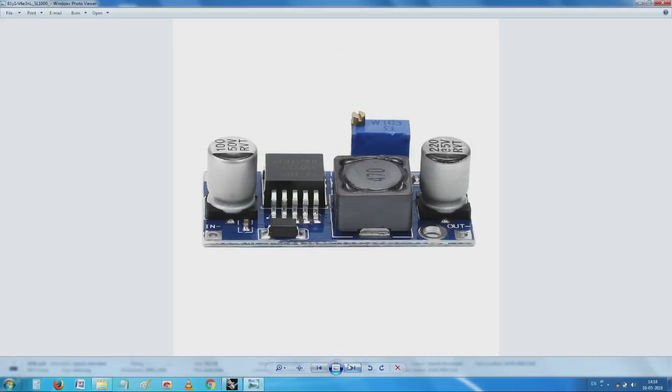Hello. So though this lecture has a little to do with 3D printing, we still have a starting point where we need to start. I just thought I would remind you from where I left off here.

You see here, this is the original 3-pin series pass regulator. You will notice the wiring and the whole thing is relatively easy. All I need is a bit of insulation here. I have heat shrink sleeves, then there is a reverse protection diode, and the whole thing has been nicely encased in an aluminum box. I have an advantage here: since it's made of a conductive material, in this case aluminum, this whole thing is very cheap.

However, when we switch over to any of these elements, these are all switching regulators. You have seen this, no? It is about the same size as this, there is no problem. That's the reason I picked up the switching regulator also, about the same size, except that it is full of electronics and full of places where it is likely to get short circuited.

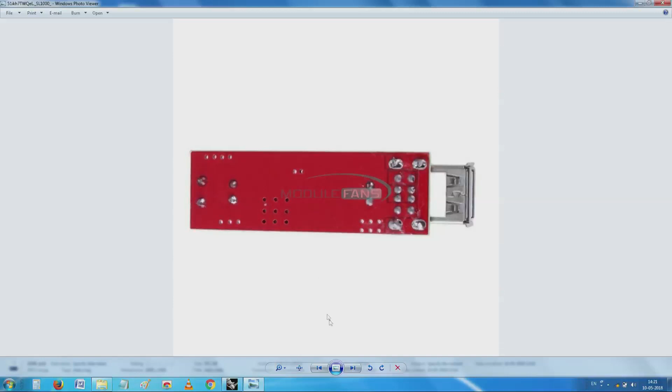Now if you kindly see the channels here, I will just take you to show something here - the same circuit, except that it already comes with... there are no mounting holes. There is only a small provision for a heat sink here, otherwise it comes with its own output jacks. This particular thing is an output, and then we have an input jack here.

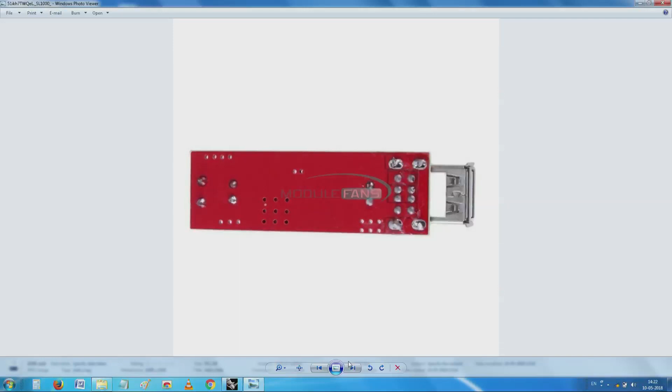So the previous picture shows you this is the input and this is the output. In this case it is probably relatively easy for us to just fabricate a cover, and there are no electrical connections involved. In fact we can make a tube-like structure, take a tube through which we can push this, and on one side we put an insulator, and overall we are in good company.

Making an enclosure with rapid prototyping for this is relatively simple. All we need to do is take the dimensions of the box outside - this dual USB thing - and miraculously they have made all the dimensions such that everything is within that height. So a tubular structure is easy, and the tube can probably stop here, with a step if you want, otherwise you make an opening, make a barrier, and then you have in and out like this. There is absolutely no issue about it at all.

Now you see this is slightly different, similar concept, except that both in and out have these screw-on connectors. The advantage of screw-on connectors is no more wiring is required, no more soldering is required.

So if I make an enclosure for it, I can ensure that the enclosure nicely sits here, and again for our... sorry, I hope I have not deleted it.

For our convenience and to avoid engineering drawings - I will tell you what the engineering drawing issue is - they have put a workshop scale and photographed it, saying what you see is what you are likely to get. So it is easy for me to see that if I look at this right edge, it is going to be around 42.5 millimeters, and that is absolutely easy. And then same thing with the other dimension also.

Then all the drawings are given here, and you see here this is a 32mm by something else, same PCB without the components, except that here you need to solder things, or you need to use a special connector and so on.

Usually this is a very good starting point of our projects. Here both mounting holes are on the same side, which is different from the earlier one. If you see here, the mounting holes are at all 4 corners. Then we come here, we have only 2 mounting holes.

Same thing here, the other dimension is given. If you check carefully, it is 20mm by some 32mm. Within the 20mm, we know at least what is the area that is required. These are generally used for plugging into some other circuits.

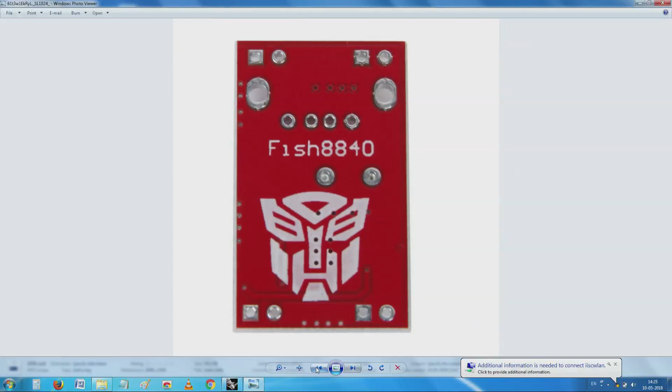Now you see at the back, we have again this same 2 mounting holes, and there is a provision here for probably a heat sink. Probably, I won't say it is a heat sink, or if you go back you will check whether something else is included in that. You see here, yes, it is for a heat sink only.

So we see here the actual chip is here. This is a toroid, or what do you call it, a transformer to increase the thing.

After you look at it, these 4 holes may be for via holes, and you see carefully everywhere this red thing represents the copper. So this copper has been made such that things are very nicely done.

Now let me stop here and show you these 2 things. Have a look at these 2 things. Sir, can you get us a closer look? They look about the same, is it not?

If I now twist it, they look about the same, except that when I turn it over, you will notice that the mounting holes are opposite. It is not about twisting it. If you twist it here, you see, still they come onto the opposite direction.

So this is the case where making a general purpose enclosure is a little problem, where our design will help. Can you see here, we have the mounting holes here, one hole top left, one bottom right. In this case, top right, bottom left.

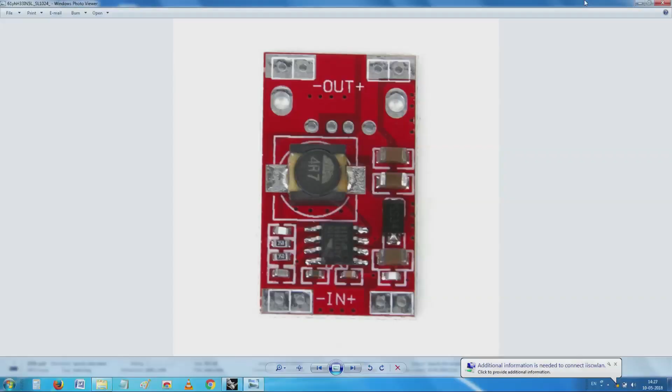Now let me go back to the drawing stage. I brought you and probably left you here yesterday.

So I have a printed circuit board which has 2 openings here, then I have a small aluminum plate, just loosely shown as if something is attached. It is not attached actually, if you go and push it here, it is very convenient, it just goes on top of it.

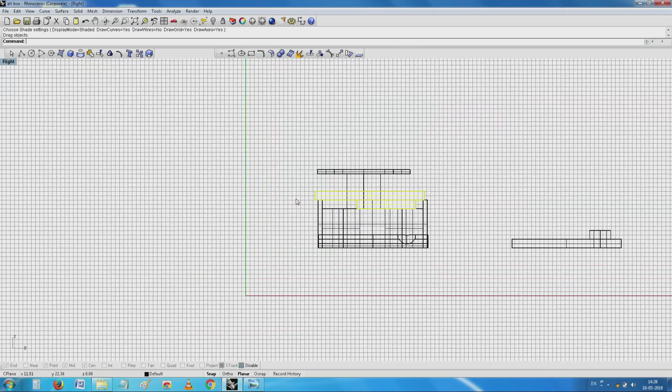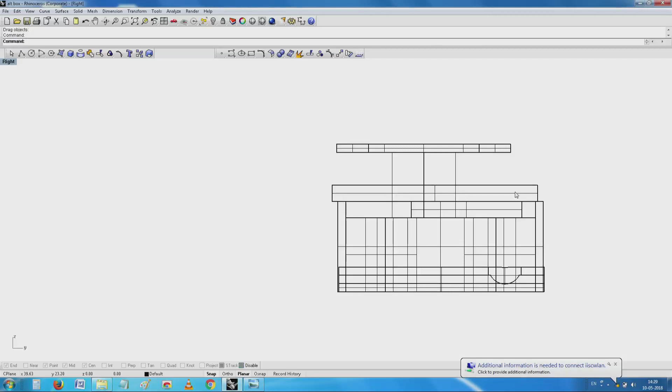In this, it goes and sits on top of that printed circuit board, and makes a contact. So maybe if I put it in this mode and then put it in the 3D shaded mode, it will probably make more sense.

So in the shaded picture you can see there. Only for convenience I have pushed the printed circuit board up. Now I will push it down for you.

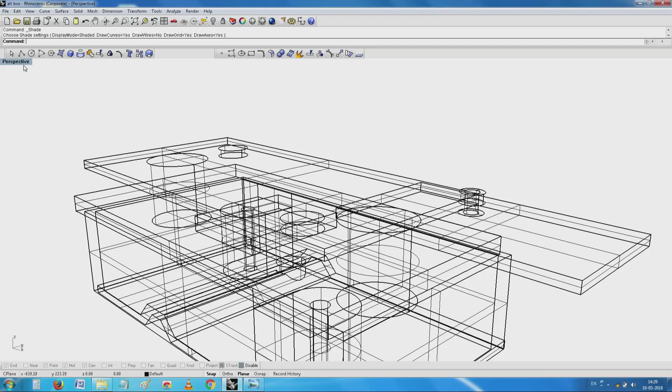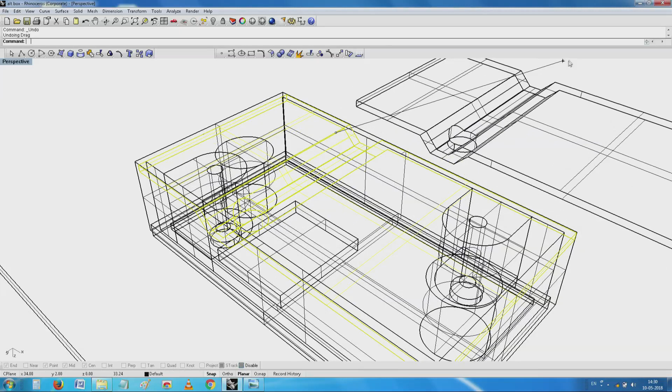And one thing which was quite okay, and now I will just show you why it is not okay, is this very fancy opening I have given here, thinking it will make it look good and maybe people will want to buy the product and so on. See this here, I had a tuning thing and then this was kept here saying it will help.

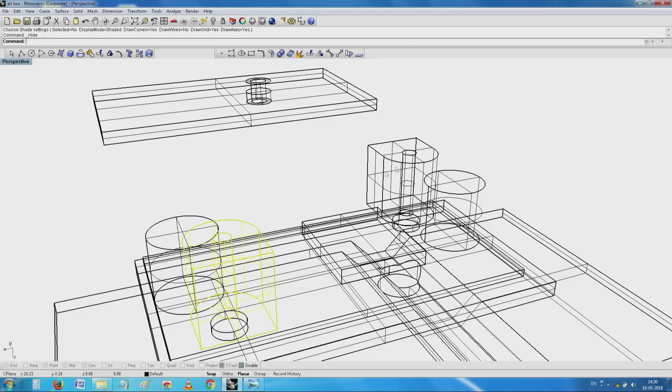Now, we come into the little bit of problems with construction of anything which involves this thing. I will now hide this to make sure that it will not interfere with our arguments. Now, you see why I have kept these bosses separate. These bosses are kept separate such that depending on the batch of the printed circuit board I have, I can move them to align with the product that we have got, because it is likely to be different. Anyway, right now I will hide them, I will hide the printed circuit board also, and just for this thing I will hide this also.

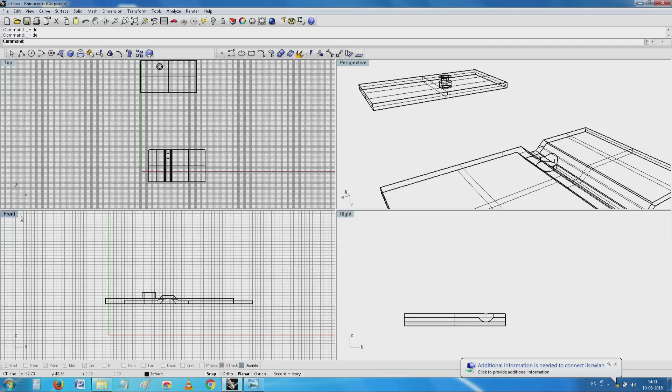Now, here we get into a very interesting, I do not know whether you should call it a problem or issue which needs to be solved. See, if I were to build a tapered piece like this, and which is again in reverse, you see it is part of the box. The building up will start now. This is the bottommost layer, the bottommost layer the build up will start.

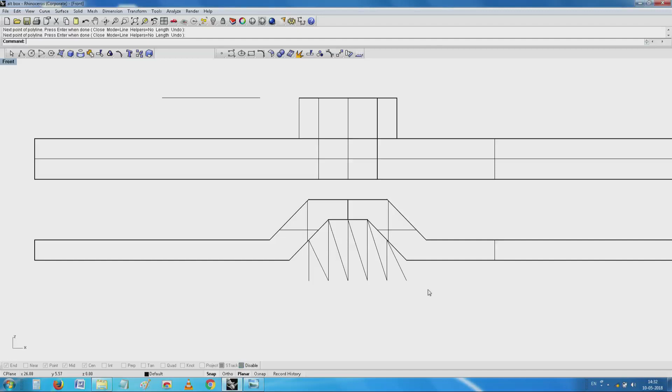Now, we have a very peculiar, you see here an angled surface which needs support from the bottom. So, the algorithm there will try to build lot of support material here. Just to make things easier, I will just try to draw a polyline, and you see if this were the base, the support material will start being built like this. Which is incidentally a big waste of effort, and further you will not get a smooth edge as we have shown here.

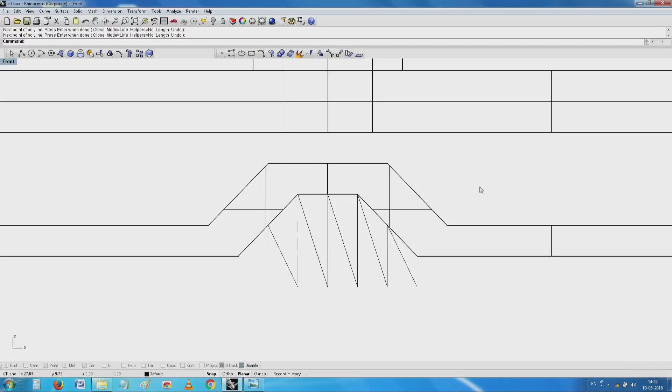It is fine because the algorithm itself takes layers, and the thickness of the layer will represent the z direction granularity, and x and y resolution will depend on granularity in the other direction. So, we may or may not be able to support, this is just a waste of material. So, is there a way of getting over this problem? Probably the easiest way of getting over the problem is, first of all, find out whether this is really necessary. Do we need to build a very complicated structure like this?

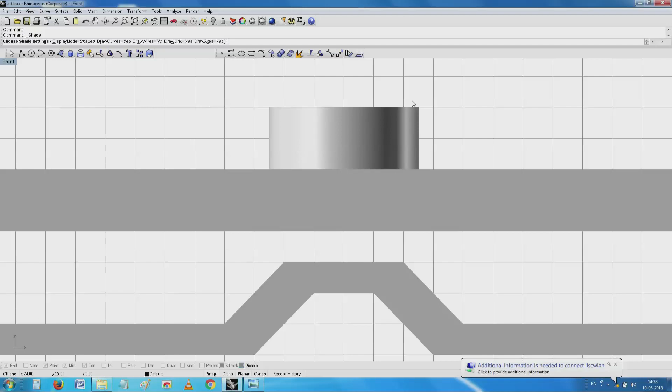Reality is no. While in injection molding once upon a time, with a little bit of aesthetics and industrial design, it made sense, similar function can easily be achieved. Instead, if you just make a cylindrical structure here like this, but one thing you notice, there is no fillet here, and right now for convenience sake we just made it straight. Advantage being the layup will start at the bottom, and then slowly after this thickness is built up, next layers will start building here. And it does not matter even if in the plan it is circular, it is not such a big deal for us. See, even in this view, if it is circular, it is not a big problem for us.

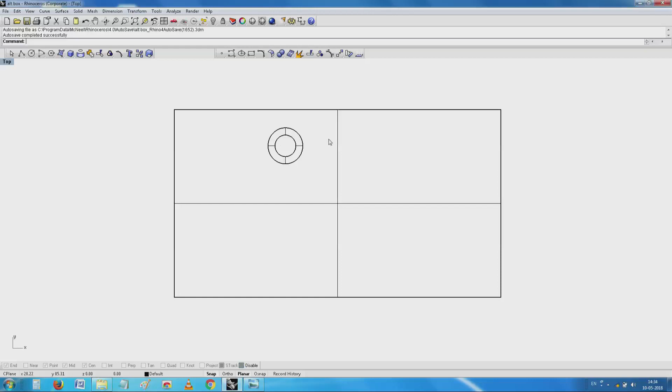So, the fused filament device, that head will start building up all these things. Once again, depending on how energetic you are feeling, probably making it a square also may make sense. Just make it a square, same way here, just for convenience I have made it a circle. Nothing prevents us from making a simple prismatic object into a square, because building up is easy. Otherwise every time it goes and comes back, a little bit of jaggedness will come here. Is there any other way? Yes, make an octagon, make a square, or make something, because what we are interested in is the center hole here.

Now, you see, building an object like this is relatively very simple, and the amount of support material and the amount of time required will reduce tremendously. I hope you got my point. My point being that if you make all those fancy things which are required maybe in mass production, in this case we can optimize very well to do this.

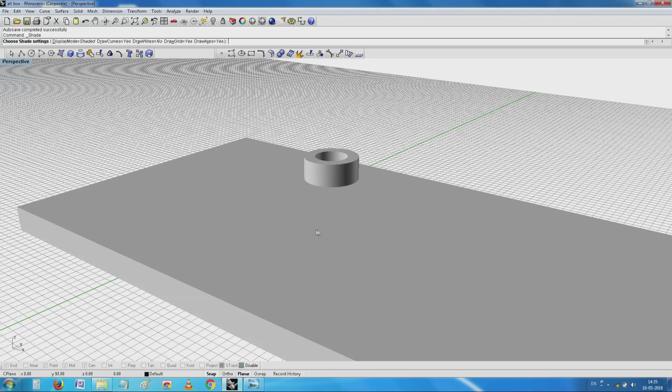Let us say you still liked the concept of a groove and it looked fine, instead of sticking to this vertical inclined thing, maybe some other way we can make. Why not convert it into a vertical channel? Maybe you can convert it to a vertical channel, make it like this, and then make the hole the appropriately correct size.

Further, you will notice when I try to make a hole, the solid modeling package has made something which looks very cute. You have seen this, no? A very beautiful, really cute looking thing has been made, which at one level, while it looks good, we do not know how well it actually builds up.

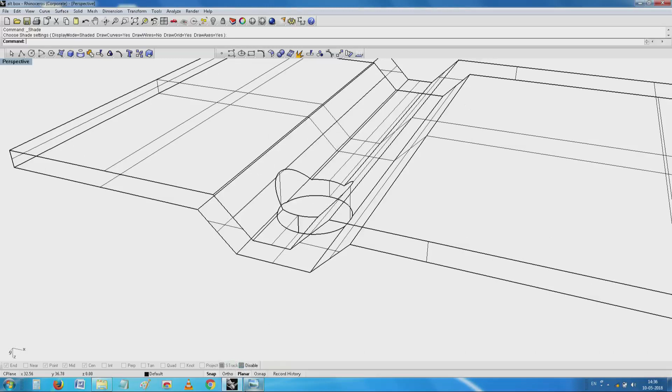See, nice, no? It looks nice as a nice thing, and all this here is probably misplaced, meaning you do not need that type of thing; all you require is a nice groove. In contrast to the groove, the other circular feature also is equally good.

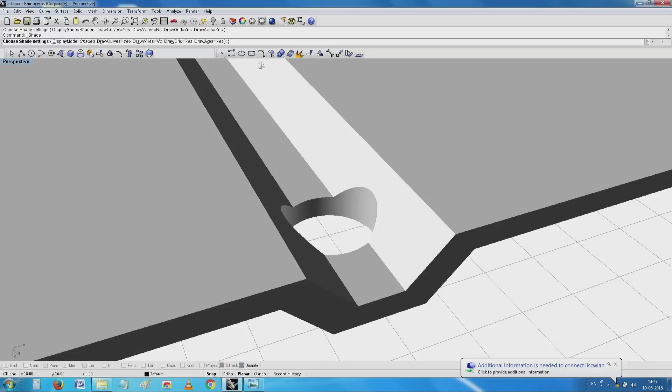Now, what I will do is unhide this whole lot and then see what is sitting where, and then put it together and see what best we can do. So, this one I will just delete. Right now I do not want it. Okay, this stuff I still have.

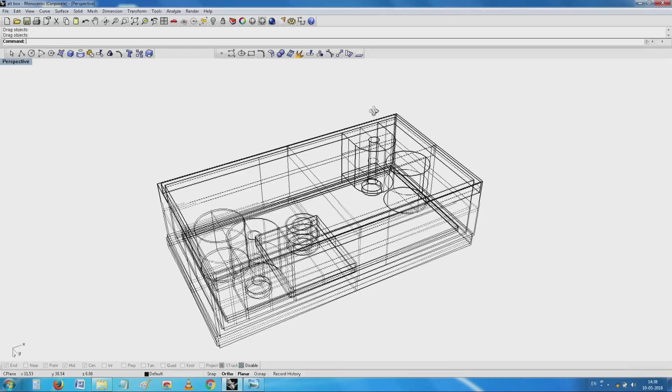Slowly I am reaching the point I wanted here. See that, except there is still a small minor thing there. This top has not aligned itself perfectly, but then it is okay. I'll just put up with it for the moment. I know how to correct it.

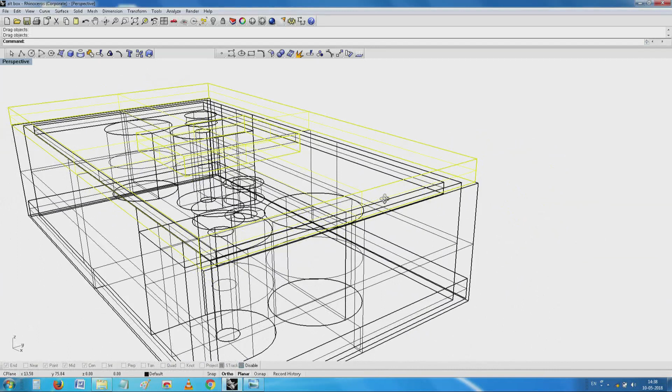So I have got a heat sink device here, and just fine. No, I think I will improve it. I will just delete it. Start with the proper heat sink device, and then again one more time I will start with the surface, which will start with a plane corner to corner.

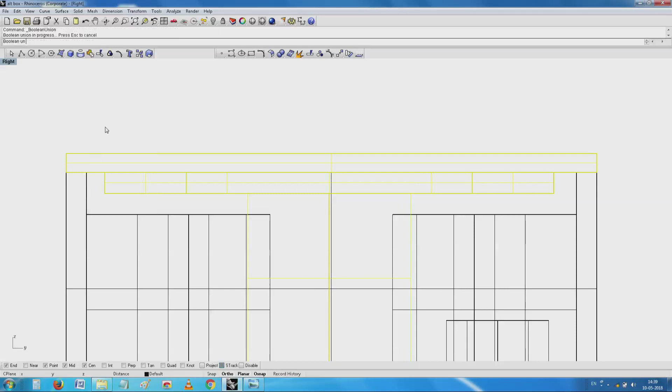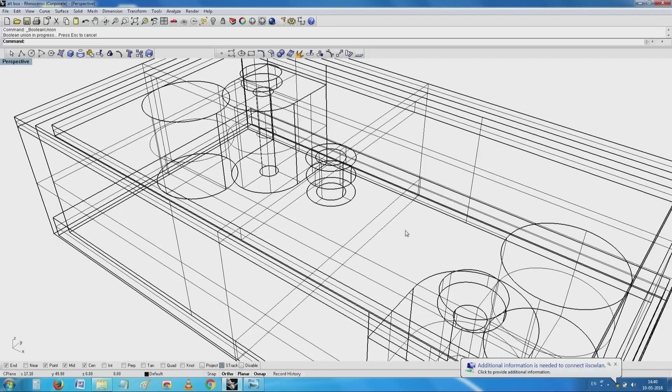This is my heat sink proper, this is the cover. I see if they are Boolean themselves. Fine, nicely it has got Boolean. Now I have got a reasonably good looking box with a place for the printed circuit board to sit, and then I have got a heat sink which will go and press on that, except the mounting hole of the printed circuit board has not been transferred here.

So what I will do is, since I have got the bushes in place, I will hide the printed circuit board, make use of these two bushes and then extend these holes there. So I try to create a solid using a planar curve. This is the planar curve. Same thing happens here.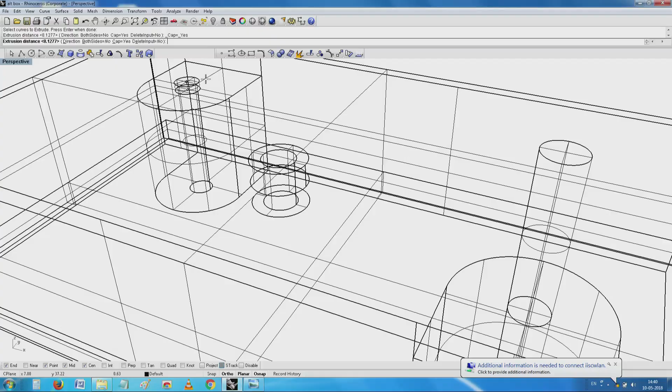You see here I have got two things which eventually can be made into this cover. So this is the cover I have created just now. So I have transferred those holes to that, then I will do the difference from here. First set of holes, second hole I will create here.

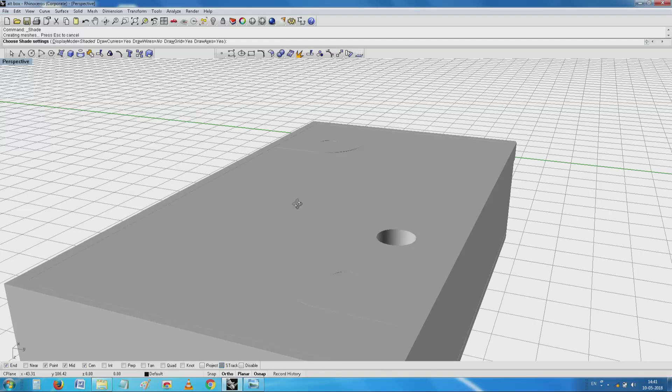See, now I have a reasonably good looking completely enclosed box, and there is a place here for me to tune the printed circuit board. Remember, the PCB is being mounted obviously upside down. Can you please show this, sir? I have a printed circuit board here, the heat sink is sitting from here, and the other side is where the tuning and so on will come. So the thing is being built upside down like this.

This is how the device will come, this will sit here, and because I have got these two mounting holes and these bushes, it will go and sit on the bush, and the heat sink will sit here, and the same holes which are given here are given on top.

Now I need to take a call on what to insulate inside. Do I put a small insulating layer, and something probably equally important is, do I pot the whole thing? There are thermally conductive but electrically insulating potting compounds. So I nicely put everything and then inject the potting; some are two-component, some are single-component things.

Once you inject it and put it together, it has two things. Intellectual protection is only a small part of it, that is not the important one. More important is, the moment you pot it, conduction will improve, there will not be any air pockets at all. Conduction of polyester or any of the resins is much better than air. And secondly, it is completely immune to any vibration or shock, but potting itself is an art. So now, you see, I will just turn it over.

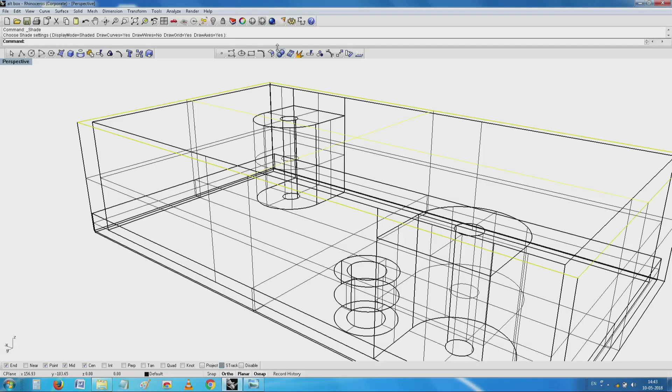Okay, that is the bottom portion. This is the heat sink part. Heat sink has holes. I will now hide this, and this is how finally this is going to be my final job which I am going to fire on the machine.

It is a little simple, it looks really quite nice and all that, except that the first thing you will notice here is, sir, why is this boss so big, is it not big and is it not small and all that. This is where you have to take a call. Logically, the same amount of material which I have left here is sufficient for here. Typically a minimum of 3 to 4 mm is required, and this hole is for a self tapping screw which goes inside. You understand, no? Self tapping screw which goes inside, and this one and so on like that.

Why I have made it a little bigger than normal is I have a nice area on which it sits, the maximum possible area, that is what I have included here. You understand, no? So it looks big, there is no reason why it needs to look big. The main difference between here and the injection molded part is, if we were to make a part like this in injection molding, one of the first things that will happen is, because of the large cross sectional difference, we end up with huge sink marks and the material will not flow at all. It is a very poor design for an injection molded part.

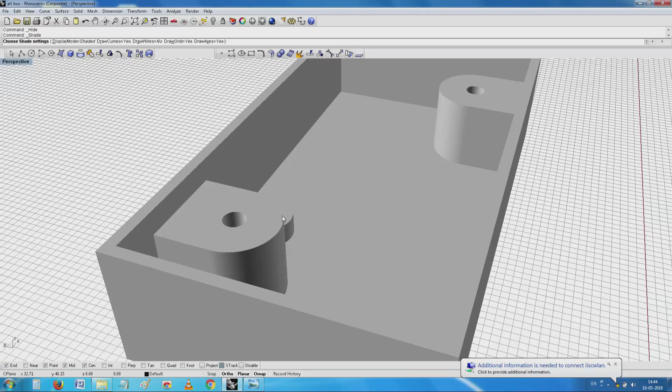But in the case of making a quick good prototype in our 3D printing, this is probably the best way to make things. You got my point? This is where the slight difference is there. Now right now I do not know, for some reason this refuses to get unioned with this. I will see whether it will still continue or it still does not like each other. It got unioned, no problem. Hey, very good, surprise.

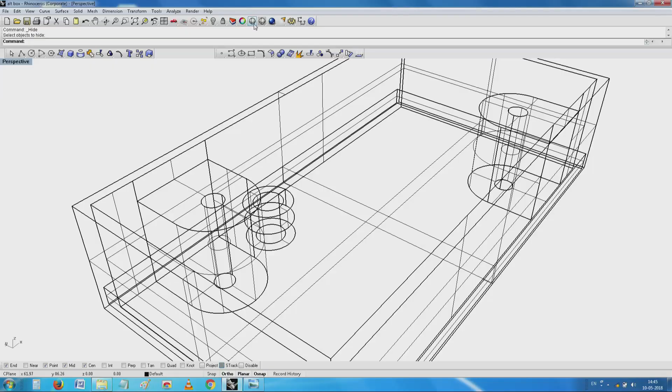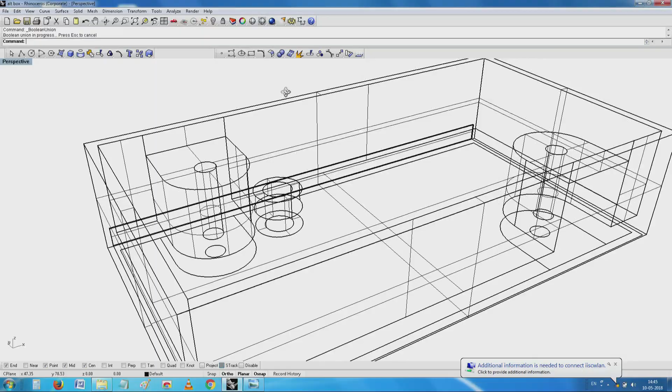So I have got a beautiful object here, the whole thing is integral, everything. Now only this bottom portion I will see if I can attach it to this, and then I will show you some other interesting objects which you will like here, solid. Then we have a union. Good. A little small error has happened, do not worry too much about it right now. The whole thing has turned out to be a single object. Because of a little projection, probably that thing has happened.

Now to make this a little more, let us say if it is to be made in injection molding, we will invariably end up having to give fillets here, otherwise it becomes very, very weak or stress concentration will occur. In this case also, if you suspect that there is too much force coming here, it may be possible for us to give fillets. Okay. Loosely I will try just one surface to fillet and show you how it comes.

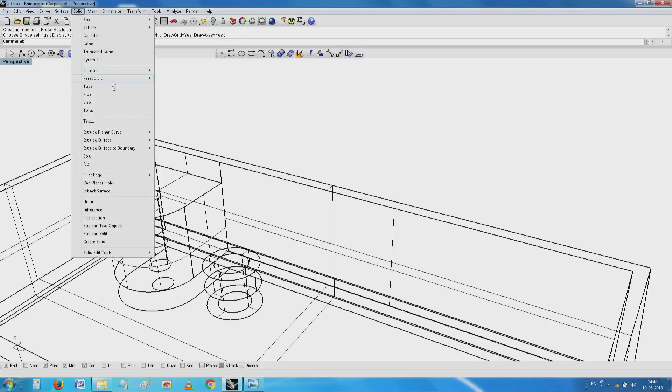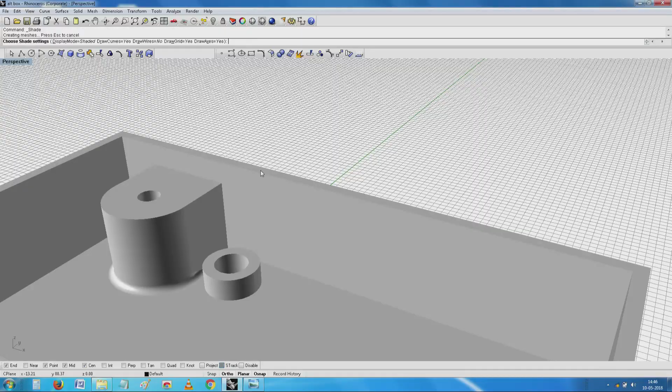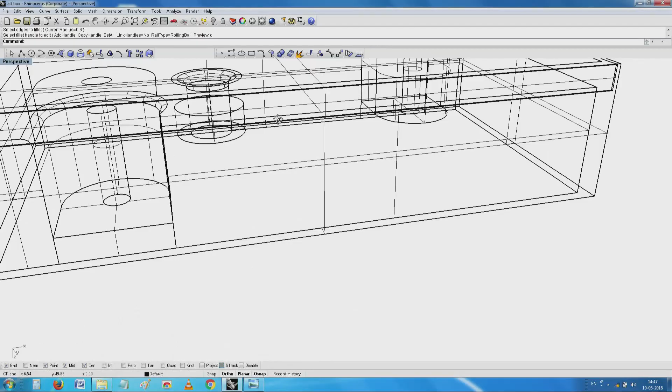Yes, I have a smooth fillet there. You have seen this. I will see now whether I can do a similar fillet here. See here, what looks like an obviously cute fillet has happened there, and correspondingly on the inside thickness, see here in the inside thickness I have one more.

This is conventionally what you are likely to see in an injection molded part, except that, as I told you, it does not build well when we come to our 3D printing. So we avoid such things as much as possible. A much easier way will be to have steps. Steps are much easier to build, even chamfers do not build well, in spite of whatever the manufacturers claim.

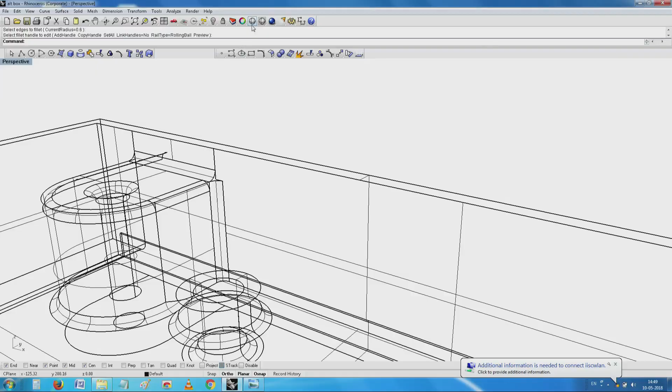See here, at least it looks nice, and it does avoid the stress concentration which is likely to occur, the same thing as we have in the other thing, except here now you have to take a little more care to see what best we can do about it. See there, it looks quite okay.

So, right now I will stop this particular experiment, then I will try to take just a flat face and show you how we can attempt to build these things here. So, I will start with a fresh drawing. As before, I will start with a surface, probably a plane.

I have a beautiful surface here, okay. Nice surface, then I also will make a small curve to build a... imagine this is the pilot hole, and then I represent the material thickness here by this, okay. So, I am just creating a step here and trying to see how well I can create a solid.

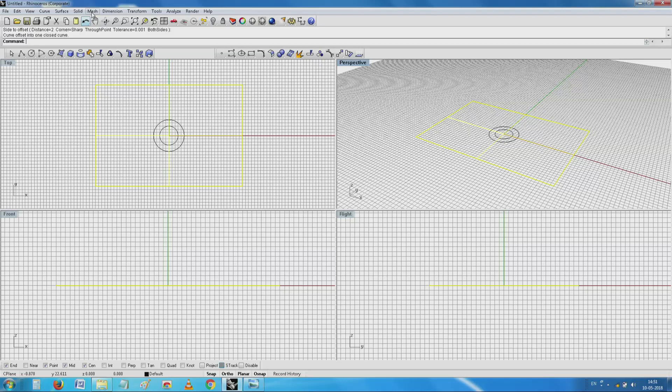I will use these two and create first of all a solid, oh sorry, no, it will not build because these are there. So, I need to build the other way only. I need to build a solid directly from... I have got a thickness here,

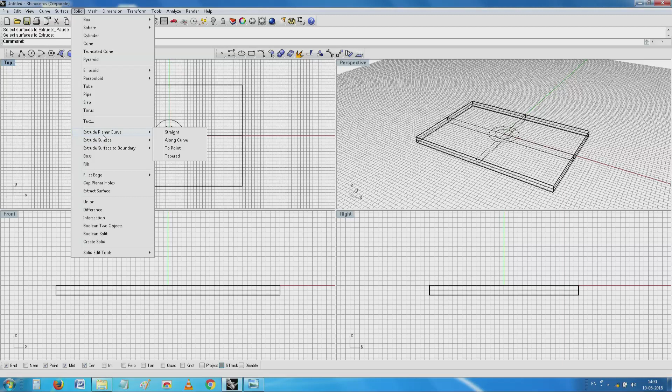see this is a very simple conventional thing here. So, this is where I thought I will spend a little more time with you. If you have to just fillet it or even chamfer it, it does not build well. Instead, our experience has taught us that I will start here, you see that circle is still kept there. I will try to make a small offset out of it.

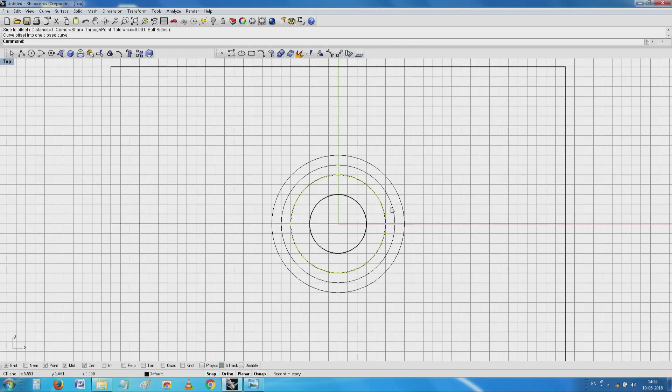I will build a small step here. Next, I will take the next two circles.

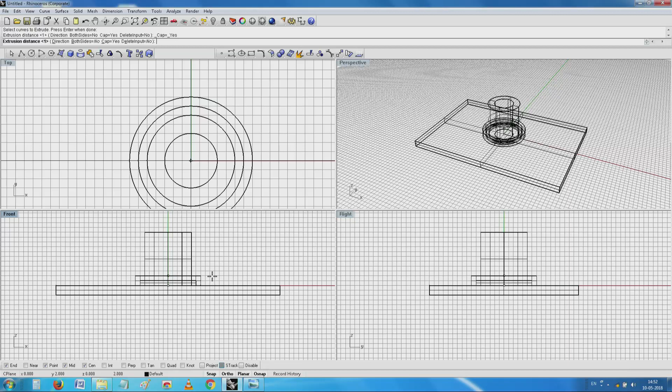This in general is a much better way of creating what is equivalent to a fillet. I have just exaggerated, intentionally exaggerated it. Generally, if you just have 3 times the resolution they talk about. If it is 0.1 mm, say 0.3 mm diameter is sufficient, and the same thing here, if let us say the resolution they claim is 0.2 mm, make something which is around 0.6 mm width here. So, we have 0.6 mm width here.

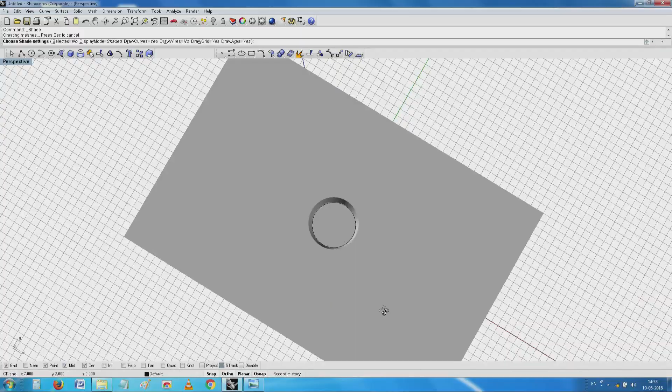Now, same thing about the building of the layers. If they say the layer resolution is say some 0.5 mm, make at least 1 or 2 mm like this. A device like this prints continuously very well without any problem. Seen this here, no? Prints extremely well. Since I have not unioned it, I still have an option of playing around with it and see if I can make this hole through.

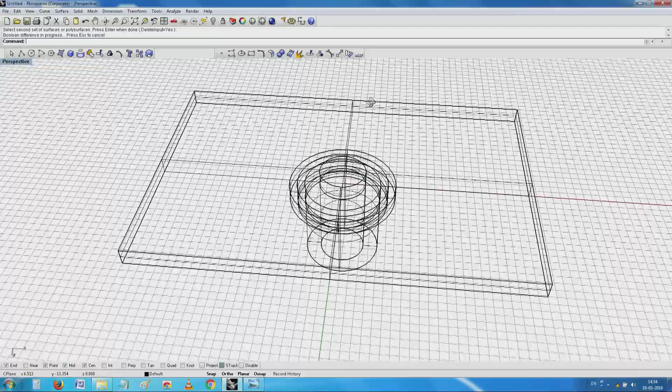I am just completing that hole there. See, I have an opening here. This is probably what we wanted, and we have achieved it. There is no problem at all. I have a beautiful

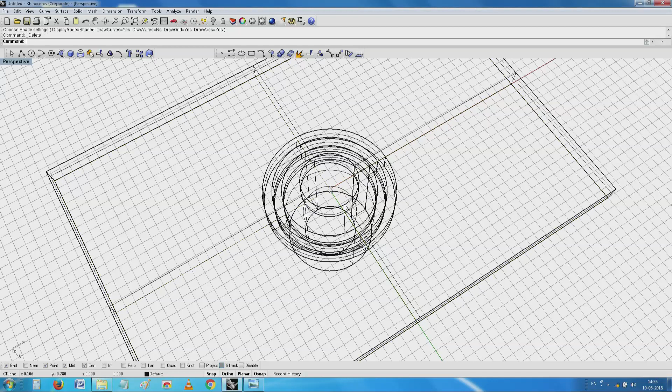object with an opening like this, and once again same consideration, generally we would like to have a smooth surface. So, having built up this inside, we have a little provision here. When we see the cross section, we can try to make the cross section as convenient as possible. So, I will probably use this inside. If you see, I had this whole thing, I will see if I can use it for creating one more thing here,

I will create a solid using one more of these planar curves. I have a planar curve here, and directly

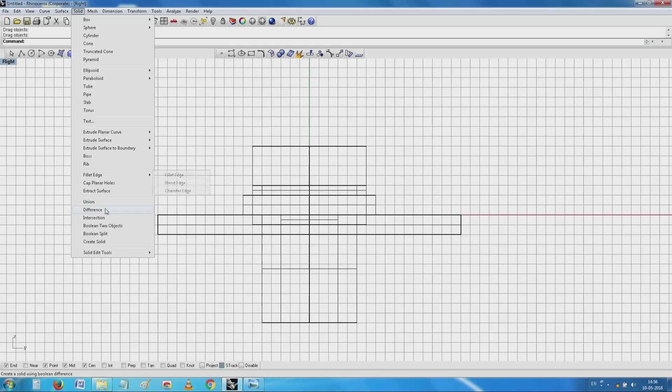now when I turn it over and see, a similar type of structure which I created that side, now I have managed to create here. We have this here. Oh, something is stuck inside. I will see if I can remove it.

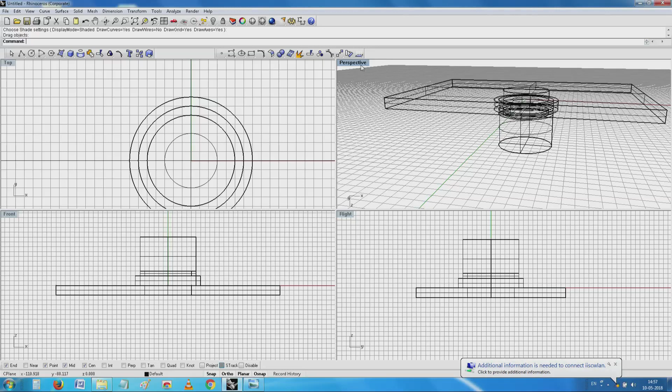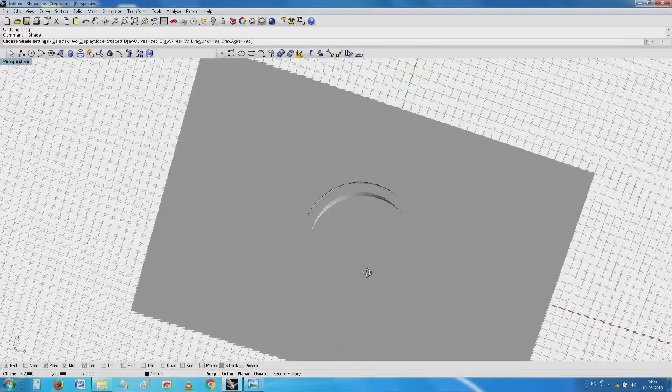I have the opening here. Only the cylinder I couldn't do properly. Now I need to take the cylinder out on the other side and see.

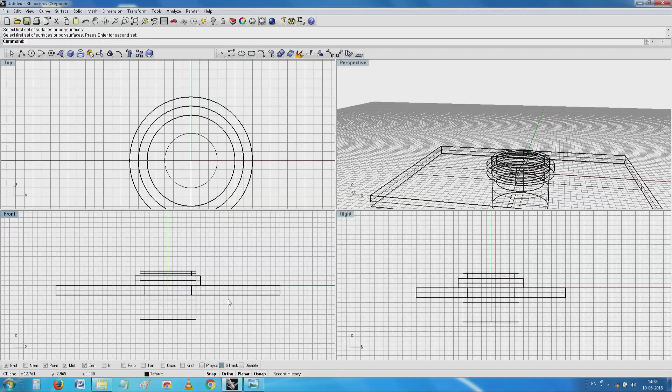I have a projection like this here on the other side, no. Similarly, I have a step there like that. Instead of depending on a chamfer, I will try to make these bigger and bigger here, just like I have a structure here, I can have a similar structure on the opposite side, a complement of it. Right now, because of my monitor problem, I am not able to judge what is happening, and anyway let me check here.

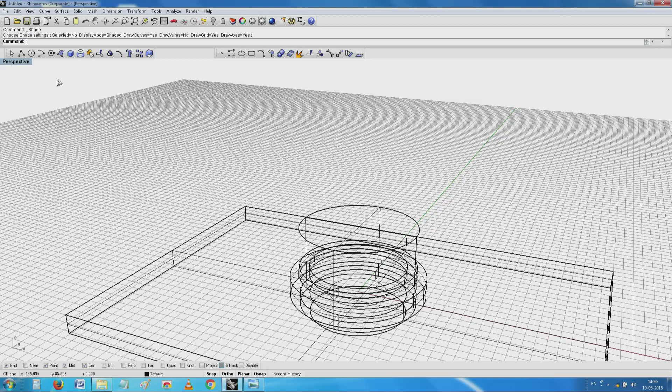No, I have lost one of the objects which I have created.

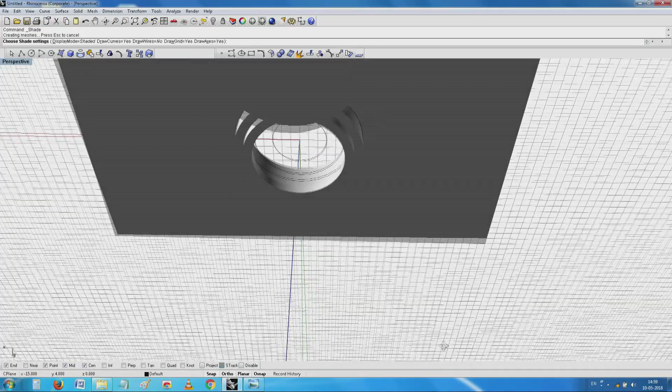I am slightly better. I have this projection on the other side, then I have a depression here, and instead of creating a full fledged chamfer, I am able to make something like this. I can make it in further steps. So, I will just try to go out and see whether, instead of taking it so deep,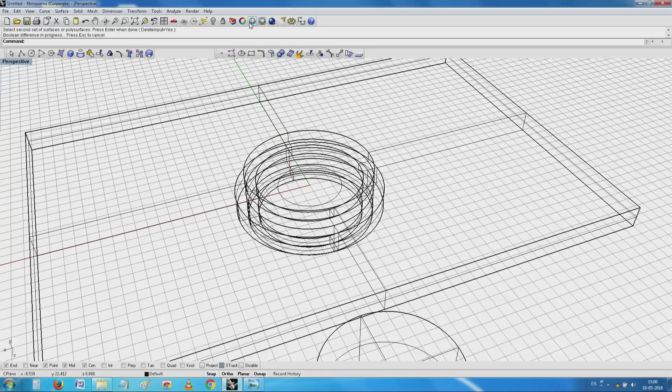yep. I think I am slightly better this time. You have seen this, no? I can see what look like a few steps here. On the other side I have this, and then whatever I wanted to construct, that cylinder with an opening inside, it is very easy for me to now construct the whole thing. And then this is the boss which I was talking to you about.

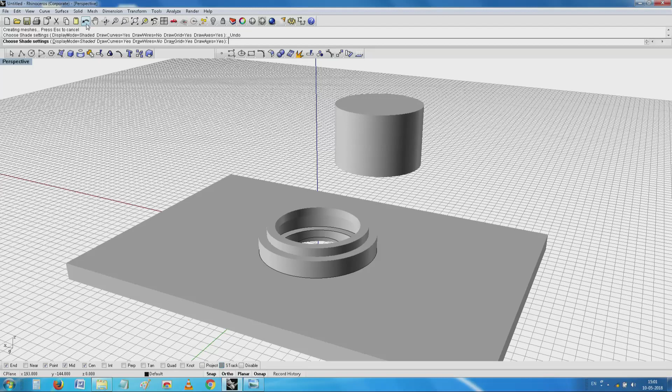The issue here is, instead of creating a chamfer, so if I go back right from where I have started, I hope it will undo all the way back to the very beginning.

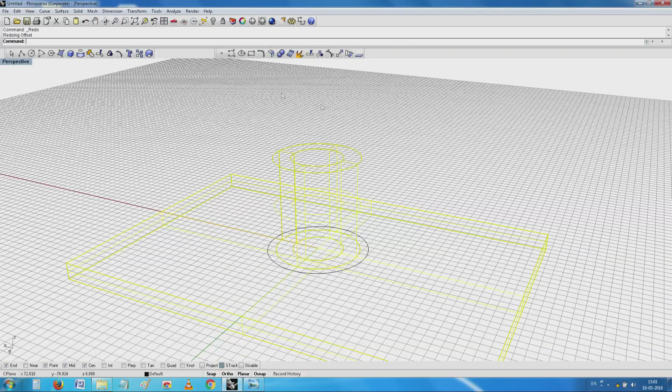See, I started here saying this may lead to a little bit of stress concentration here, so some crack may start and all that. I need to fill up this area. Instead of filling it up, there is an automatic command which is already available for me. So, if I boolean this, I have a beautiful command which will help me in

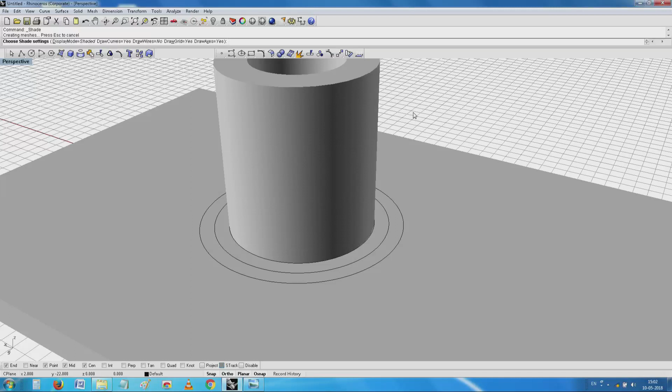What looks quite good here and convenient is unfortunately, in the case of building, not very convenient. So, what I wanted to tell you is, I will try to make a small, what do you call, I have an edge here, say I take this curve and start building.

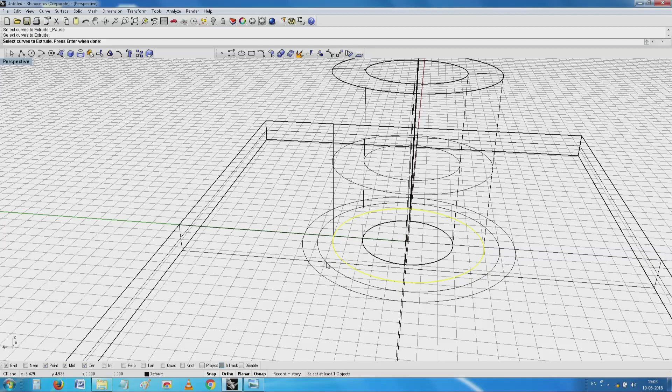See a thing like this, features like this, and even just a simple 1 or 2 thickness devices will be sufficient for me. And on the other side, same way, instead of it being projected out, the similar object can be taken on the other side, and if you subtract it from there, I have features which are relatively stable, relatively good, relatively easy to build.

If you are building it vertically from here, right now if it is being built vertically like this, there is no issue, these things will build very well, because the device will come here and do everything. Now let us say in the horizontal direction, and then it is curved like this, we end up with serious problems of material and so on. There you need to avoid any horizontal openings.

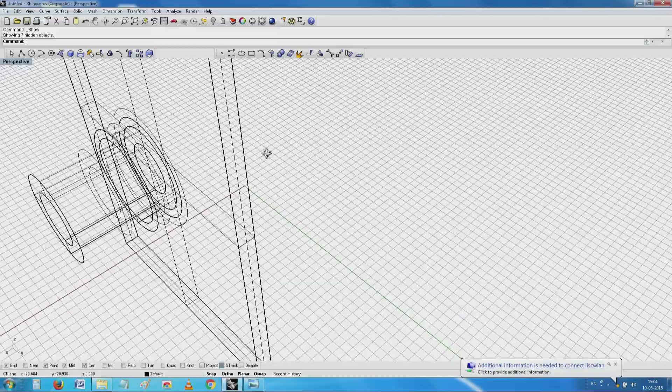The same thing, imagine this was in the horizontal direction. So, instead of being like this, imagine now this, it is still tricky to build. So, a lot of support material is there, a lot of waste material is there, a lot of other ways of building it and so on.

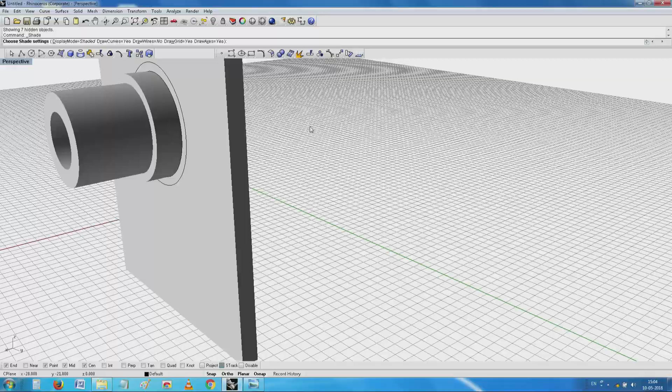Here you need to make a little bit of your own judgment and see how best you can do it, and then after we go to the machine, we will be able to show you a few things. So, for today let me keep that aside. I have come part of the way.

Unfortunately, things are very rarely so clear, saying we have an insulated part and then we have a conveniently printed circuit board, and in this case the cover of this can itself, an aluminum plate or conductive plate, can come and clamp it, and then it seems to be okay. Not true all the time, unfortunately. We also occasionally end up with things like this, which are metallic components. I have a metallic component here. I think all of you know what it is.

It is some power device, some switching device, and it needs to be attached to the printed circuit board, and then we have a heat sink also here. So, how you deal with these things in rapid prototyping is do it in two stages. You have the printed circuit board, you assemble the printed circuit board, make some arrangement.

Now we have a small lug here, which earlier was being soldered into the PCB. It is integrated into the printed circuit board. We make some arrangements, probably make a small gap here such that it sits comfortably here, and then we also have holes, and the material can flow through that. So, we have a printed circuit board which sits inside.